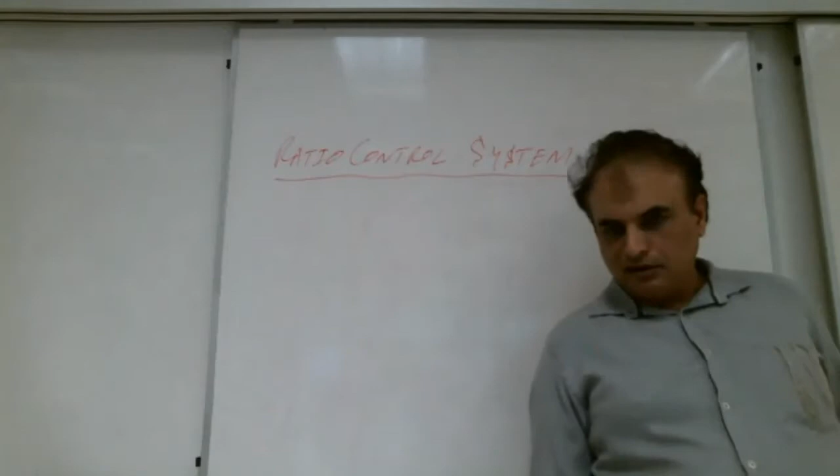Right now the time is 2:41. Can we go to 3:41 without passing 3? Is it possible, Shabab? No. So this is the biggest cascade we have, right?

Yes. So can we change the... Can we bring our car to D without pushing the brake? No, but it depends. No. So this is cascade. First we push the brake, then we bring the stick to D. Right, Shabab?

Shabab with me? Yes, teacher, with you. That's good. A lot of brothers are saying yes.

That's good. Okay, Shabab, how many brothers know how to cook rice? How many brothers can cook rice? Shabab with me? Maybe nobody. How come? No, a lot of brothers are saying yes.

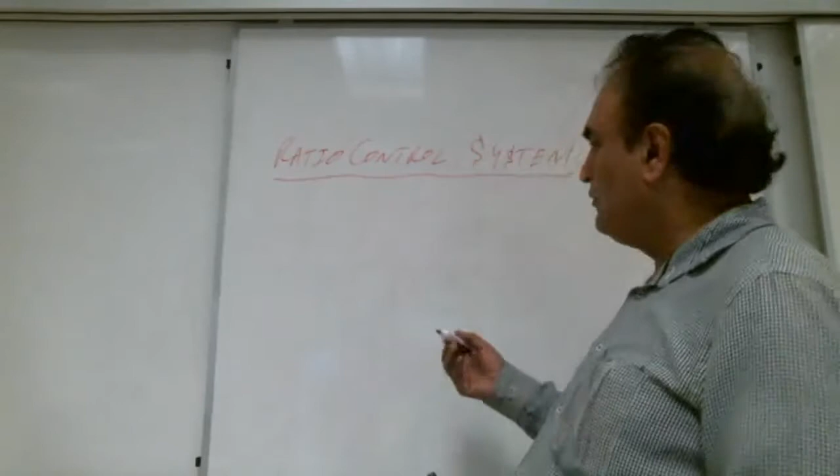Yes, with you. Okay, that's good. Okay, if we have 1 cup of rice, how much water do we need? How much water, Shabab? 4 cups maybe, or 2, 3 cups?

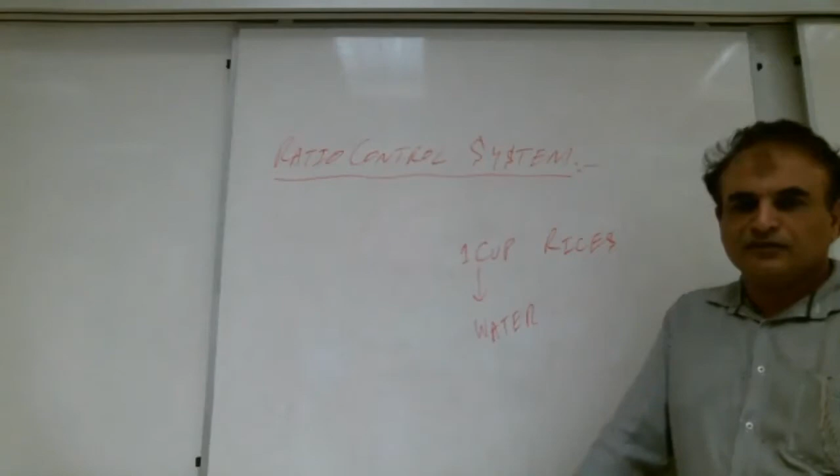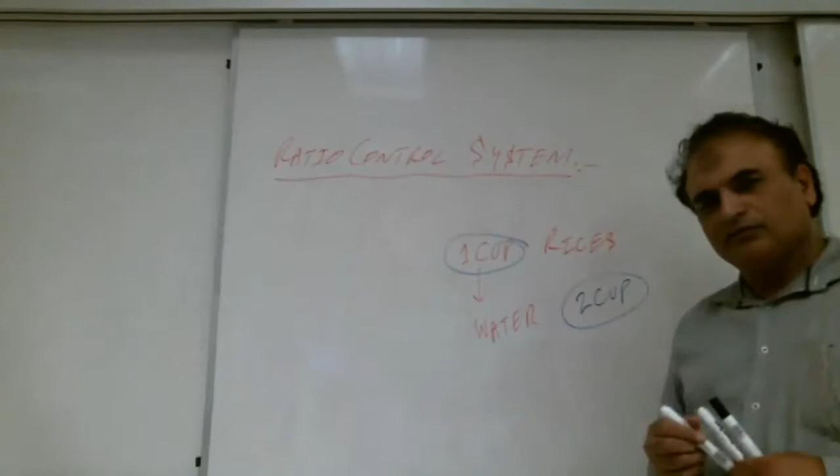Very good. Brother Ali is saying 2 cups, 2 cups always. So what is this control, Shabab? Ratio. Very good, a lot of brothers are writing ratio.

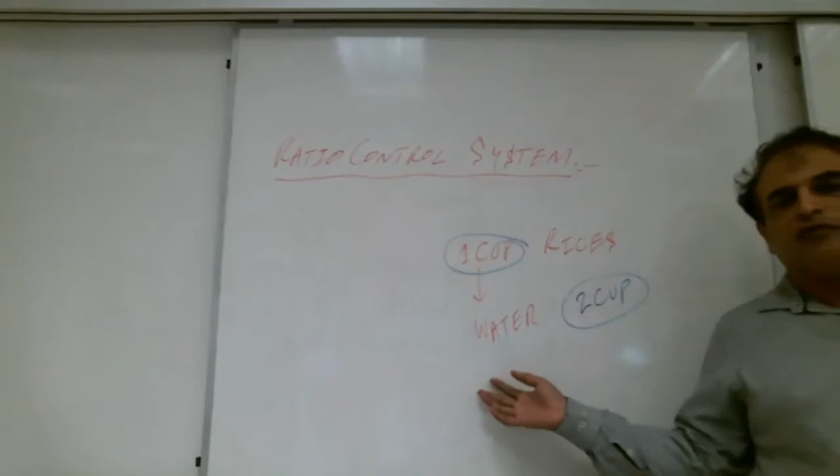This is ratio control. In our life, we are revolving around ratio control. Everybody is taking a breath, right? Right, Shabab? Everybody is taking a breath.

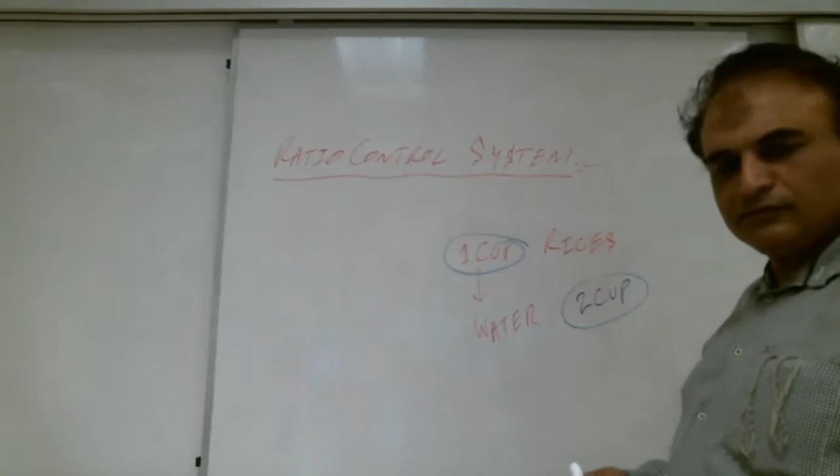So how much oxygen should be there? What is the ratio of oxygen in the air? Not 75%. Yes, Shabab, what is the ratio of oxygen in the air? Approximately how much?

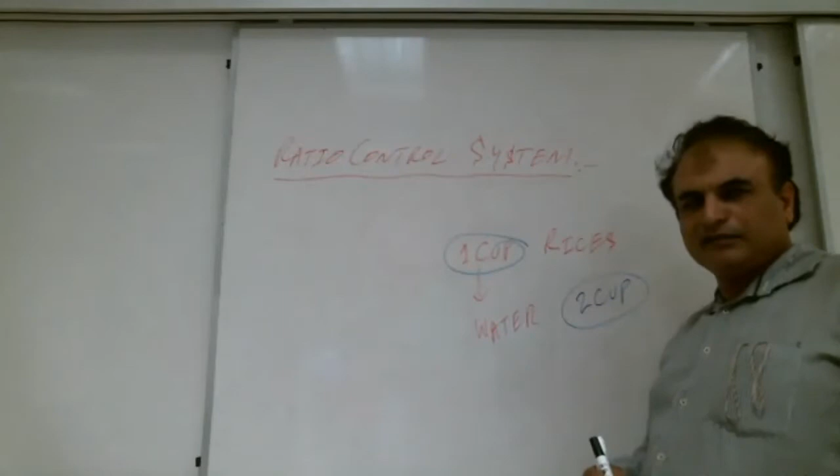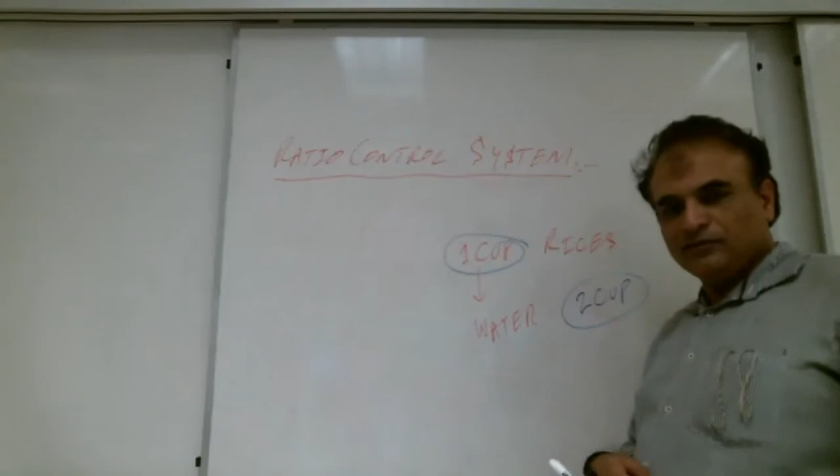Not 80%. Check the internet. 20, teacher, maybe 20. Yes, approximately 20%. Approximately, I am not exact. Approximately 20%. So again, this is ratio control.

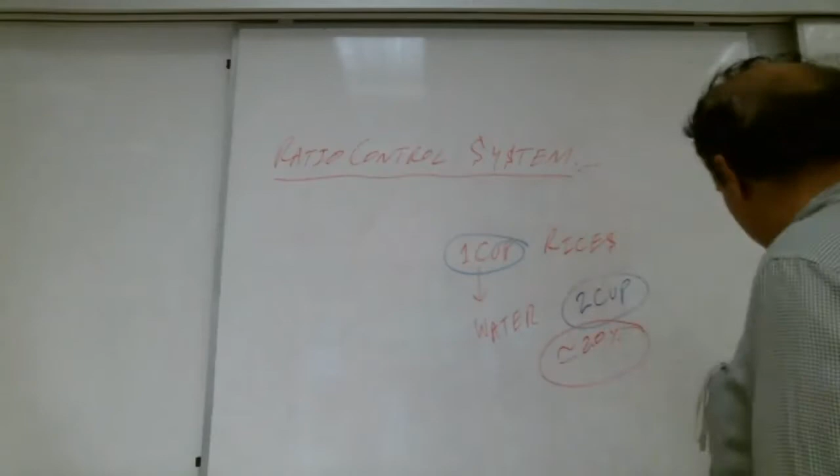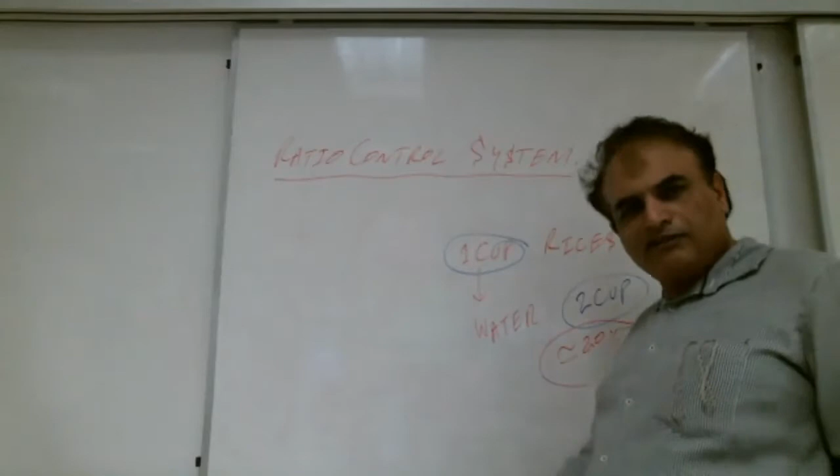How much is the percentage of water in our body? Yes, Shabab, how much is the percentage of water in our body? Okay, one brother Ali is writing 70%.

Imagine for 1 minute, say it is correct. If it decreases, what will happen, Shabab? Whichever ratio is there, if it decreases, what will happen? Yeah, Shabab. If this ratio decreases, then what will happen?

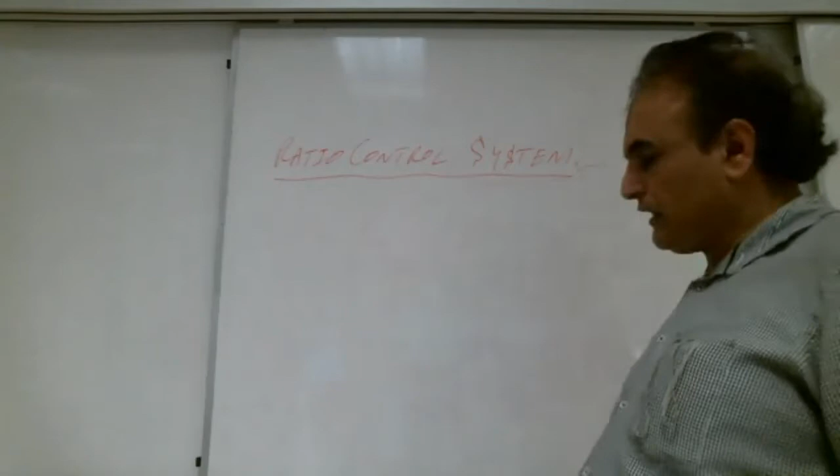Maybe die, teacher. We will get sick. If any chemical ratio is disturbed in our body, we get sick. So then we need to take medicine. Shabab with me?

Yes. Shabab with me? Yes, with you, teacher, continue. Okay, that's good. So for ratio control, let's start with the example.

Let's start with one example. This example we already discussed approximately, but from another perspective. Now we are taking another perspective. So we have two streams coming. Two streams are coming, Shabab.

This is feed 1 and this is feed 2. Right, Shabab? Shabab with me? Yes, that's good. Flow indicator transmitter 1 is there.

It is sending signal to the flow indicator controller 1. It is sending signal to the I to P converter. We have a valve here like this. Same here.

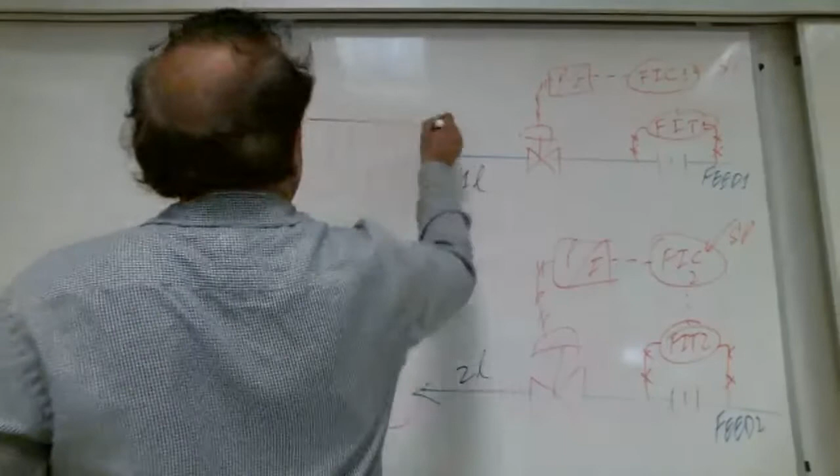So we have a motor here that is mixing it. So it will be mixed. Shabab with me? Yes, with you, teacher. Okay.

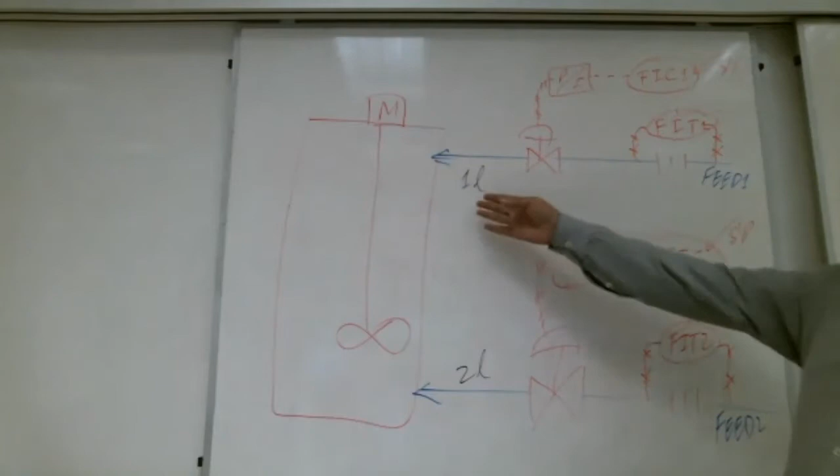Now, if it is always 1 liter and this is always 2 liter, is it necessary to put all this equipment here? Is it necessary? Is there any way that we can save some equipment? We can save some equipment, it means we can save some money. Is it possible, Shabab?

Yes, brother, listen. Okay, tell us how we can save it. Please tell us.

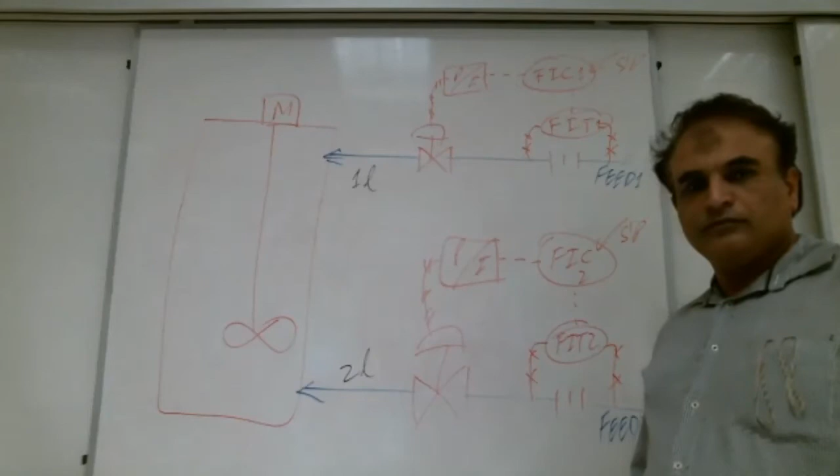So he is giving one clue, and this is good. Minimum he's thinking, so yes, we can save the money. So what we can do? We remove this controller. We remove all these things, right?

We just take this one there, and what we do? We bring this signal to the signal calculator. Signal calculator. This signal calculator is like a calculator.

Any of you guys have seen the signal calculator, Shabab? Some brother has seen the signal calculator? No? Both me, no, okay, no problem. When you come to the lab, please, I will show you the signal calculator. It is like a simple calculator.

It takes 1 input, 2 input, 3 input, 4 input, whatever we want, and gives the output according to our settings. We set the calculation. For example, its output will bring here to this controller.

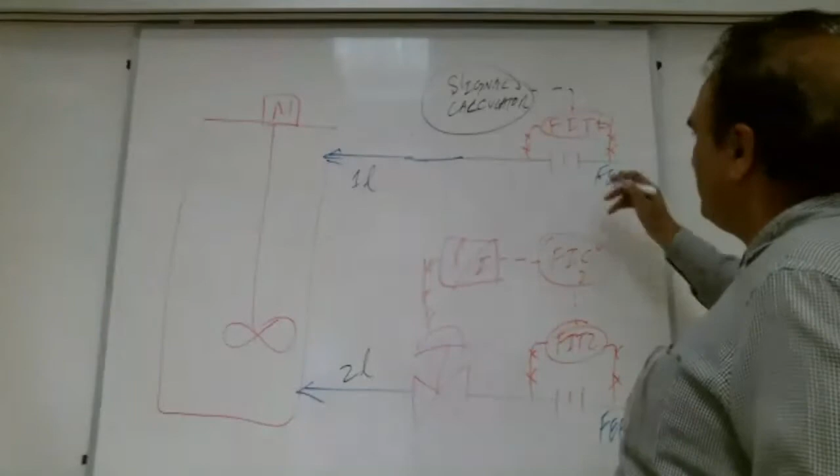So this one is 1 liter, this is 2 liter. So what should be the calculation here, Shabab? What should be the calculation here? Very good, 1 by 2.

So here if it is coming 1, it will multiply with it, it will give the output 2. Right, Shabab? Double the output. Shabab with me? Yes, okay.

Now when this ratio is fixed, we can save the equipment like this. So how much we save? A lot. We save one controller here. Right, Shabab? Very good. And one, Brother Ali is writing one controller here.

We save one transmitter. Transmitter is here. Brother Ali is writing also the transmitter. No, transmitter is still there. We save a controller. We save the I to P converter. We save the control valve. 3 things we save. Right, Shabab?

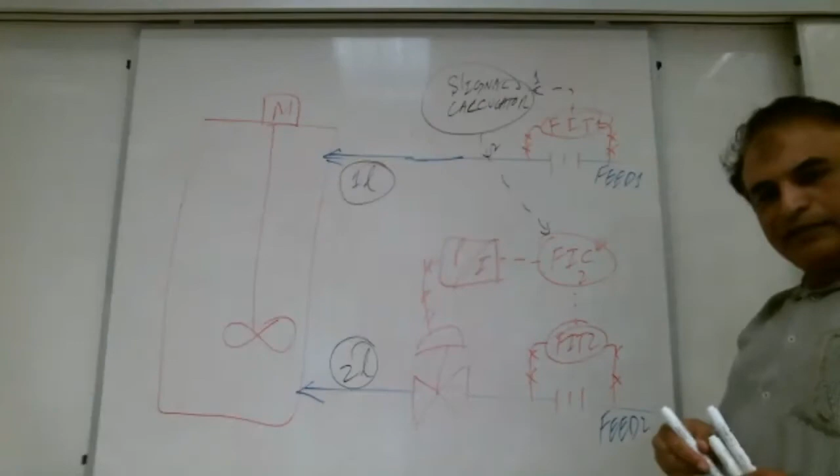Yes. So what do we lose? What do we lose? Always there is a bargain. You take something, you give something. So what do we lose?

Now feed 1, does feed 1 have any control, Shabab? Does it have any control? No, no. So now this feed 1 becomes wild. Uncontrolled. Right, Shabab?

Fine. And this feed 2 is controlled because the controller is on this feed, right, Shabab? So we save the equipment, but we make one feed wild, uncontrolled, and the other feed we make controlled. Shabab with me?

Yes, teacher, with you, continue. So what is its name? What is the name of this feed, Shabab? What is the name of this scheme? Ratio relay controller. What is the name of this scheme, Shabab? Ratio relay controller. So we're going to discuss 3-4 more schemes, inshallah, Shabab.

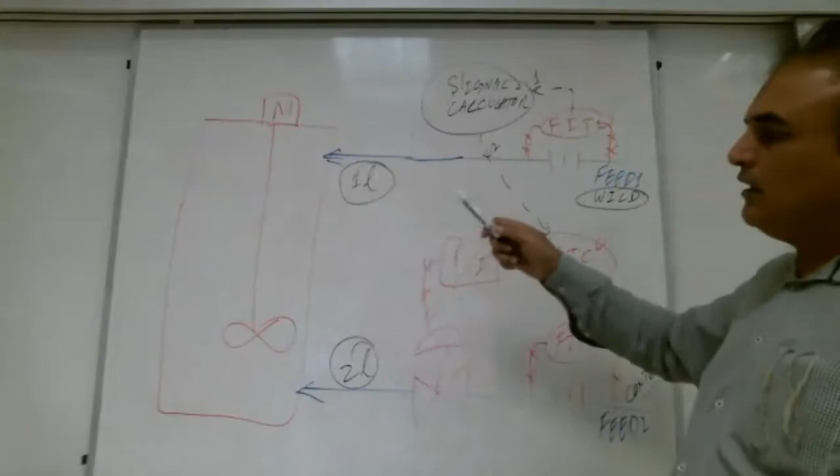Imagine this is milk, this is water, or whatever you want, you can imagine. We were bringing them here, mixing. Always this one, always 2 liters this one. Like rice: 1 cup of rice, 2 cups of water.

Okay, somebody asked us: this ratio is fixed and it is all the time we are using it like this, so why don't we save some equipment? Okay, so how we can save? We will remove the controller from here. We will remove the valve from here. We will remove the I/P converter from here.

Take this signal. This is what? PV. Bring it here. Now this signal for this controller, it is the set point, SP. Right, Shabab? It is working as the SP. Okay, no problem. And the PV is coming from here. And this is the output.

So if, for example, here it decreases, it will also decrease here. Imagine it makes it like 0.75 liter, so it will also close this valve, reduce it. Right? If it is increasing, it makes it 1.5 liters, for example, more flow, it will also open the valve more, and there will also be more flow here.

So what do we get? We save the equipment. We save one control valve, one I/P converter, one controller. Now what do we lose? What do we give?

It is a bargain, so we give this: now this line is uncontrolled. This feed 1 is uncontrolled, wild. It becomes wild. But feed 2 is controlled.

But again, it depends upon our application. If it is like milk and water, no problem. But what happens if it is very sensitive, then we need to think. Then we cannot apply the ratio controller.